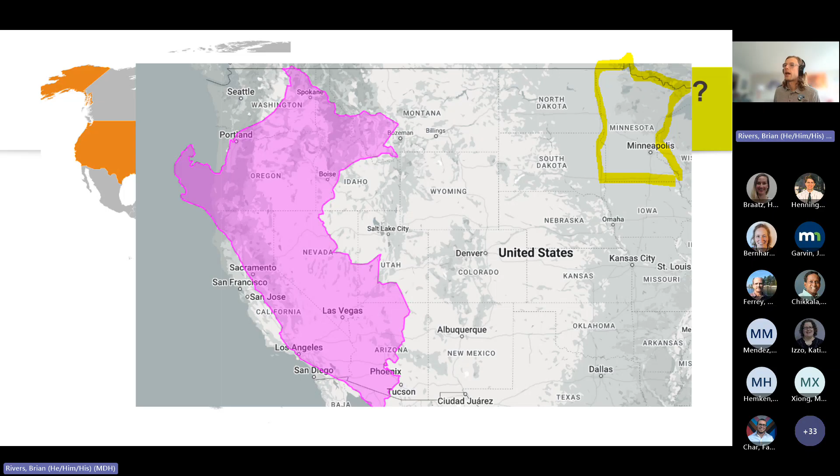So we don't only work in Peru, but we also work in Guatemala, we work in Bolivia, and like I said earlier, we also have domestic projects here in Minnesota.

So I've alluded to Peru, but let's talk about my favorite country outside the United States. This is Peru. It's famous for being the seat of the Incan Empire. It's one of the most biodiverse countries throughout the world. I think I'd heard that there's like 120-ish possible biomes that exist on planet Earth, and Peru has roughly 85 of them. So it is an incredibly biodiverse country.

It has some of the driest deserts in the world, contrasted with some of the rainiest and lush green jungles, which is the start of the Amazon. And then you have the soaring Andes, which is the second highest mountain range in the world. If you've eaten a potato, if you've ever had beef jerky, much of our blueberry production and banana production comes from Peru as well. So the food there is excellent. Yeah, it's a pretty excellent country.

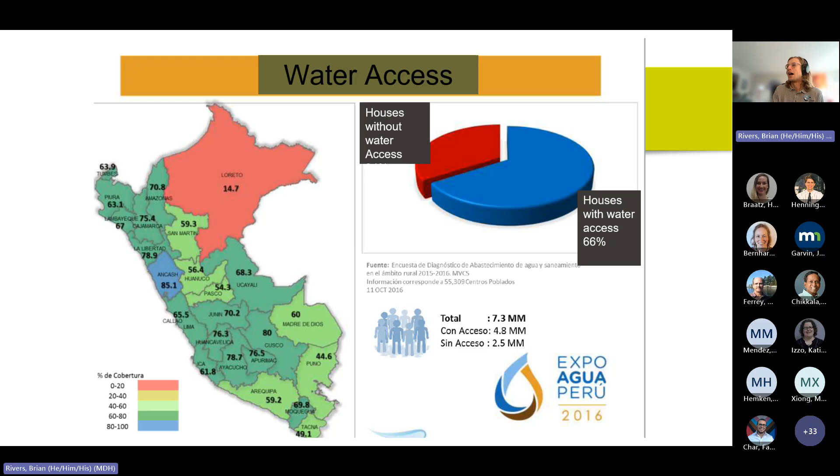For those people who may or may not have visited or know where Peru is - in orange, you have the United States of America here. In grade school, I always thought North and South America were directly below each other, but really South America is offset, where their West Coast more or less aligns with our East Coast. So if you take a 7-hour trip from Miami all the way down to Lima, you'll be in Peru. In this picture it kind of looks like a smaller country, but when I tell people about the size of Peru, I like to say it's pretty much the West Coast states all smashed together.

For reference, there's Minnesota. And if you were to take Washington, Oregon, California, and pretty much all of most parts of Nevada, and then some parts of Arizona and Idaho, you would have roughly the size and shape of Peru. So by no means is it a small country. Where we work is kind of maybe north of Las Vegas, as I would put it, in the jungle region, just over the Andes.

Being an incredibly culturally diverse, but also geographically diverse region of the world, getting resources to places can be pretty tough. And so water access - these stats are as recent as 2016, so I apologize for giving you antiquated data, but this was the best way to break it down as I could find it.

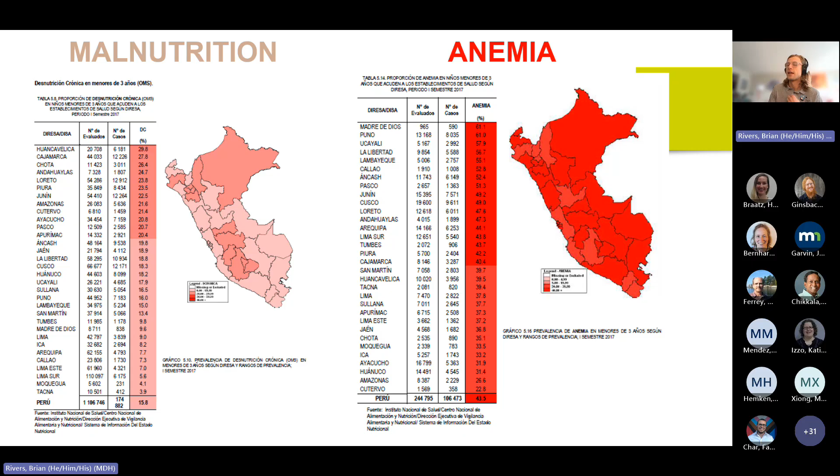When we talk about sanitation, the access is almost the opposite. 2/3 of people don't have sanitation access in their house, so that's quite a bit of a larger gap.

We even knew that when we were working in Peace Corps, everyone wants to work on drinking water because that's the snazziest, easiest, picture-friendly way to improve people's lives and deliver resources. But that's not the whole picture. We want to think about another whole slice of that pie: wastewater.

I found out that many communities were much more hesitant to work with wastewater because there's kind of a stigma around working with excreta and channelizing waste. Unfortunately, that really lags behind in places throughout Peru, for developmental reasons but also cultural reasons. So that's a really big opportunity to work on projects going forward.

Even within this project, we're working on drinking water, but that community still doesn't have a form of wastewater system, collection, treatment, and disposal. So that's definitely a huge opportunity we have going forward to expand our impact in this community.

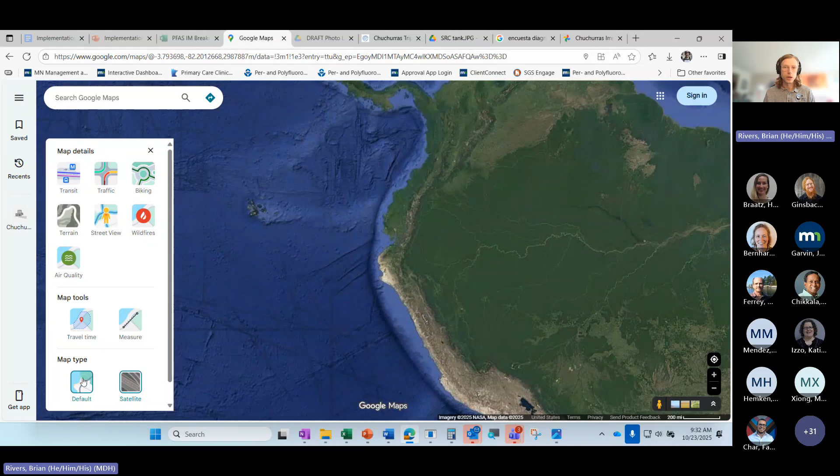Here we are in good old St. Paul. We take our flight down to Miami, then down to Lima. So here's Peru, in South America, on the west coast. We flew into Lima, and driving all the way to Chuchurras would be extremely difficult.

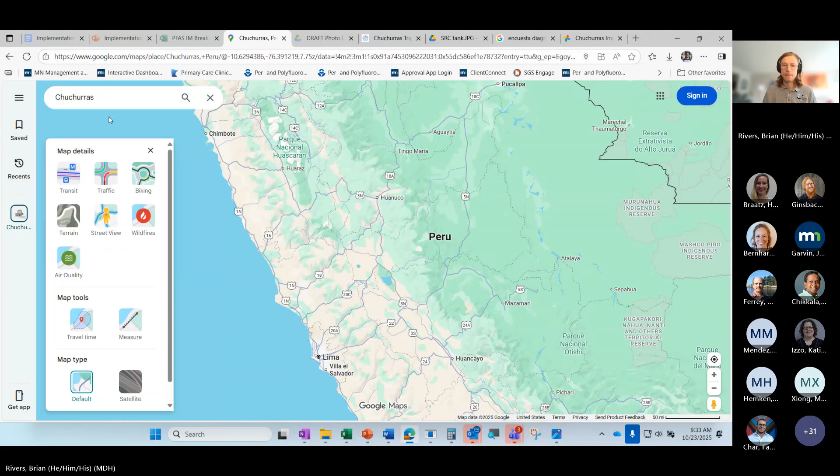Let me put up the terrain view. So there's our project community right here, and there's Lima. We flew into Pucallpa and took a nice 7-hour drive through the jungle. You can see the Andes Mountains here, and Chuchurras is just as you're leaving, nestled in a nice little pocket between a tiny hill range and the start of the Andes. Yeah, this is the community.

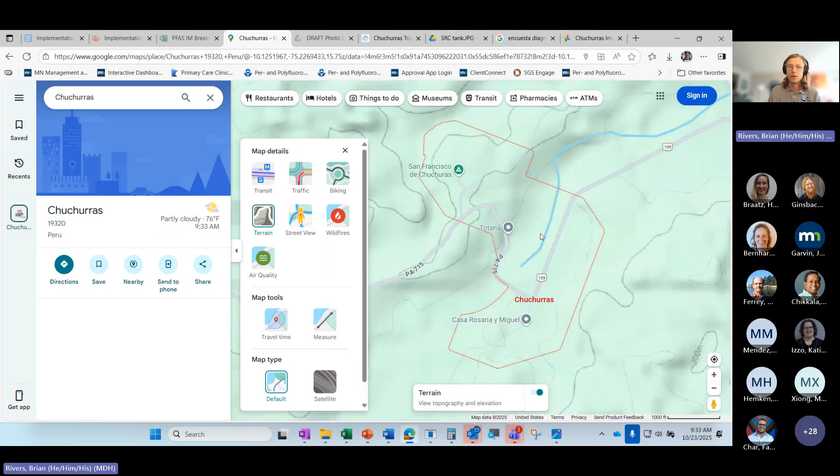Let's go back to satellite view. The community is really split into two different parts, 500 people throughout all of it. There's Santa Rosa on the southern bank, San Francisco up on the hill on the northern bank, and then there's the Chuchurras River — at least I call it that, but I'm not sure if that's actually its name.

But there's a river that flows through it, eventually becomes a tributary to the Amazon. When you're working in the tropics, they don't have quite the marked seasons that we do here. They don't have an autumn, winter, spring, summer. It's usually the wet season and the dry season, and during the wet season there's abundant water.

So the community had kind of an old, dilapidated drinking water collection system, but that only served the Santa Rosa side, which is on the southern bank. The San Francisco side, throughout the entire year, had to drink from the river. And if you know anything about surface water, it's a very vulnerable source of water.

We took some coliform tests with us, and of course those came back positive. So it's not a source of water that we want people drinking from, and they didn't want to be drinking from it either. That was the impetus for this project.

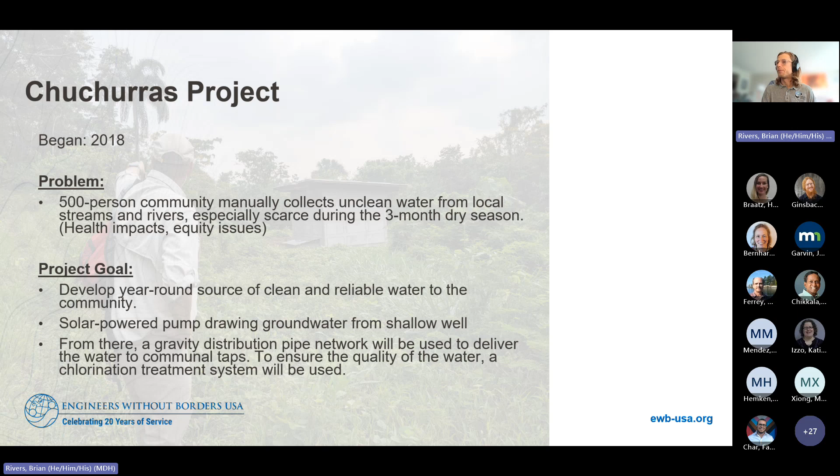This was kind of the timeline of the project. Back in 2018, we flew down there. I was not involved at that point; I was actually still in Peace Corps, so I was in country but far from here. We went and inspected the existing infrastructure that they had, saw some of the lapses and gaps in the community on the north side, and then started our assessment evaluation.

There were a couple of different designs, and eventually we landed on this solar-powered pump. Then in 2020 is when we were supposed to have our first implementation trip, but of course COVID broke out, so that prevented us from traveling.

So we were able to do some remote implementation with some contractors and people from Chuchurras as well. That started the well siting, the construction of the well, and the well house, which these people are standing upon right now.

In the second implementation trip, that was in 2023, we installed the solar panels on top of the roof, built out the distribution system, installed some communal taps, and then put in the first set of reservoir tanks. Then in 2024 is when I traveled, and that was the third trip.

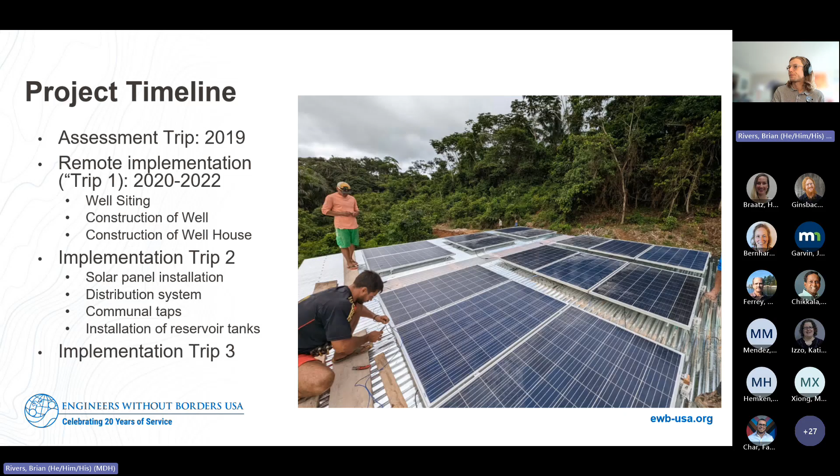Being that you're in a low-lying basin, you don't have a lot of hills to work with. The community did as best as they could on that south side, but there's really just not much topographic variation there. So part of our trip was to find something higher, a place where we could put 10,000 to 40,000 liters of water and deliver that throughout the community.

So we met with the community. We had a big communal meeting in which residents from both communities came and voiced their concerns and their needs. Then we came back to the United States and did a lot of the engineering analysis from the data we gathered from the initial assessment trip.

And then we're like, okay, great, we're ready to travel. And then COVID broke out. So during COVID, this was actually taken in 2021. I think most of these people had vaccines by this point, so I noticed they're not doing a lot of social distancing, but I think by this point that had made it down to Peru.

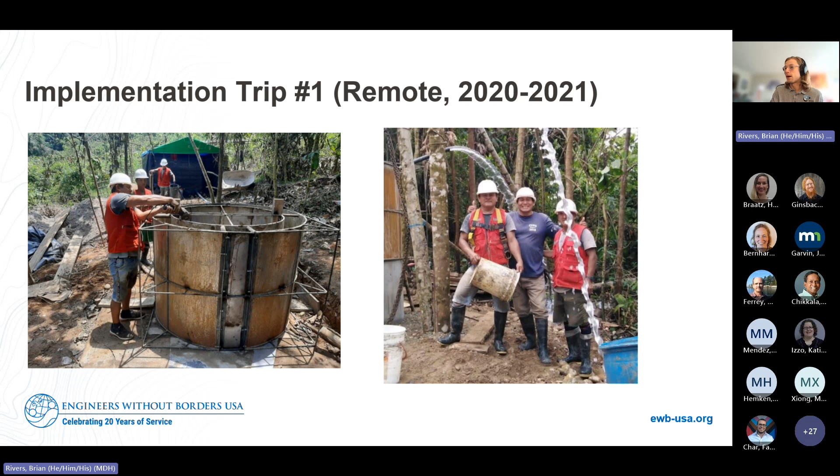They were able to get the water out, though I don't know how, because we hadn't installed the pump by this point. Maybe it was just an artesian thing. But that was a really big moment for that community, being able to find groundwater that was cleaner and more protected than some of the surface water sources they had. They were all able to do that on their own. We didn't have boots on the ground at all at this point.

The first time that we made it to the community was in 2023, once we had that well built. Another thing that's kind of missing from these pictures is that Ben-Hamin actually built the well house around this well. Once we had that water source secured, we started building out all of the distribution system.

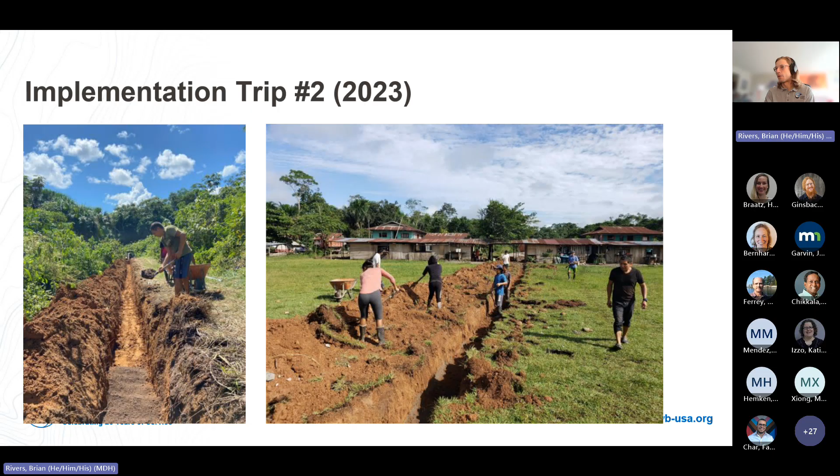The community showed up in force. We had probably 50 to 100 volunteers helping us. They did not dig all these trenches by hand—there was definitely an excavator there, but a lot of the manual work was putting the tubes together, making sure there was a nice fine layer of base underneath to protect it, and then backfilling it back in. So we did a lot of that with an excavator, but a lot of the manual work was just placing and securing that pipe.

You can see a little bit more of the well house here, which is where the well is inside of. We installed some valve boxes to be able to control the flow to and from the source. That occurred while we were in country.

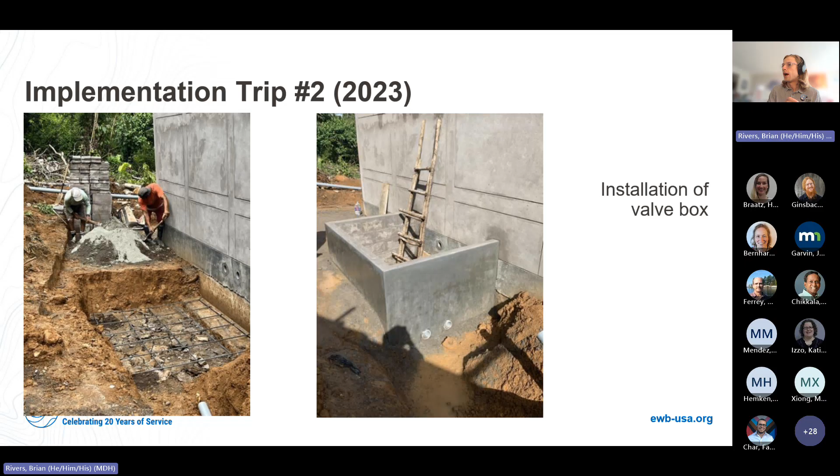This is a picture of that finished well, and this is when we were installing the pump. This is Paige, one of our volunteers, installing a Grundfos SL 900. I think I'm mixing up my Hach instruments and my Grundfos instruments, but that's a pretty awesome product from Grundfos, which is a solar pump.

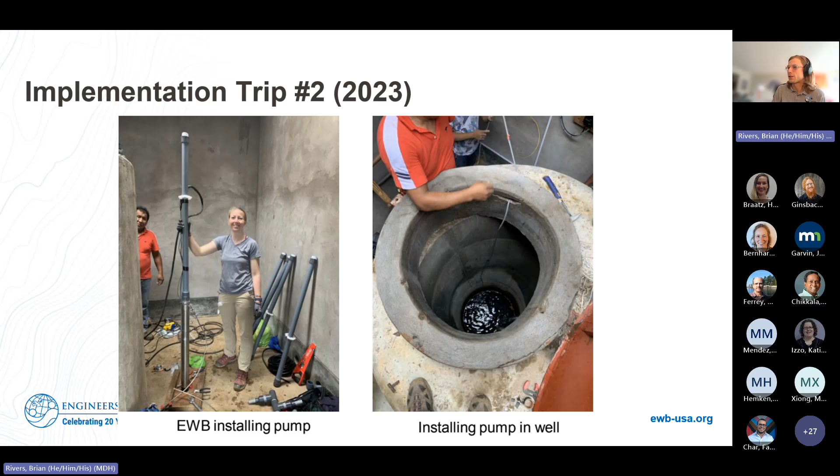And that is what delivers the community their water. So we installed that in the well. And this is a much better picture of that finished well building, or the pump house, I should say.

So once we got the roof in place, we secured these solar panels, which power the pump. I wish I had an actual flow rate for you. I could make one up off the top of my head, but I'm not going to do that.

This was another amazing feat for that community, to build something of a state-of-the-art facility for that region to get water from a groundwater source. We take wells for granted here in Minnesota because we have so much of it. The groundwater is so abundant, but in Peru, a lot of communities rely only on surface water. So having something that can draw filtered water out of the ground is a huge step.

I'm glad that you don't take wells for granted, Michael.

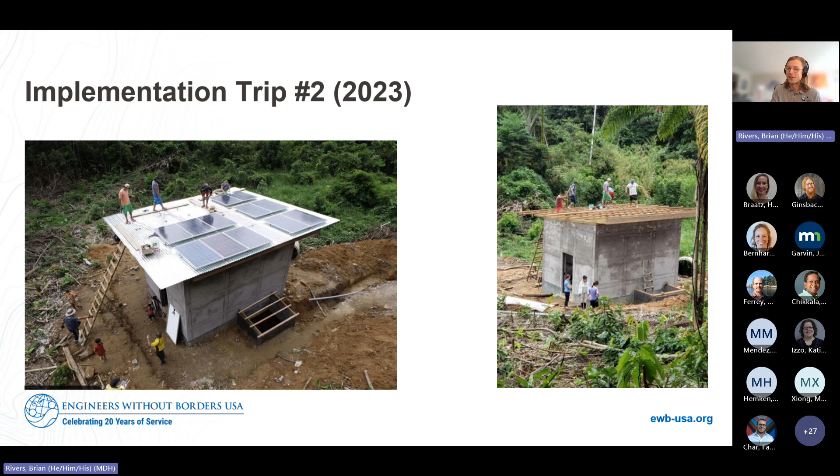I know we're getting up on time, but in October '24, after we built out the first part of the distribution system, we wanted to expand that as well as update a lot of those reservoirs. We had installed 4 tanks, but we wanted to quadruple that size, and then install the chlorination system, automate that pump, as well as install some communal taps.

As you can see here, this was actually just a picture. This is what happens from the celebration at the end. Chris brought some manufactured snow from Minnesota, so that was kind of our token. And all the kids, of course, just pounced on it like vultures.

This is how we got to site. It took us about 7 hours to drive 170 miles, which included a couple of river crossings on these ad hoc flotillas - like 2 river boats slapped together to get your car across. That was a very unique experience.

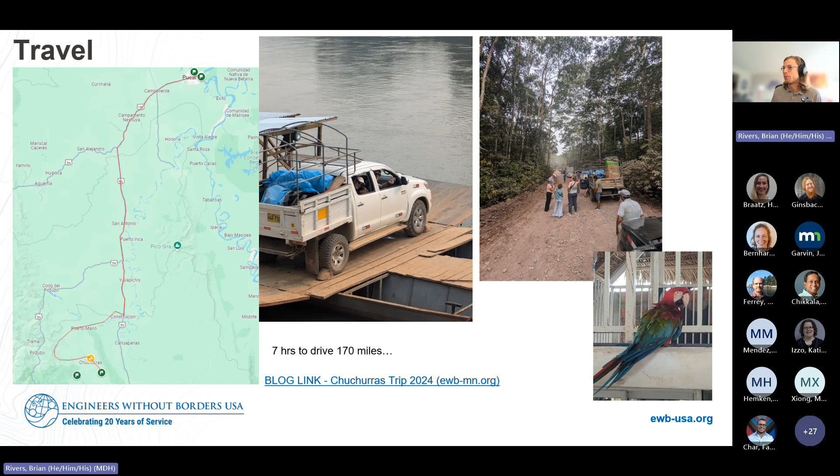We ran into some road construction, saw some cool birds. So yeah, this was the project here.

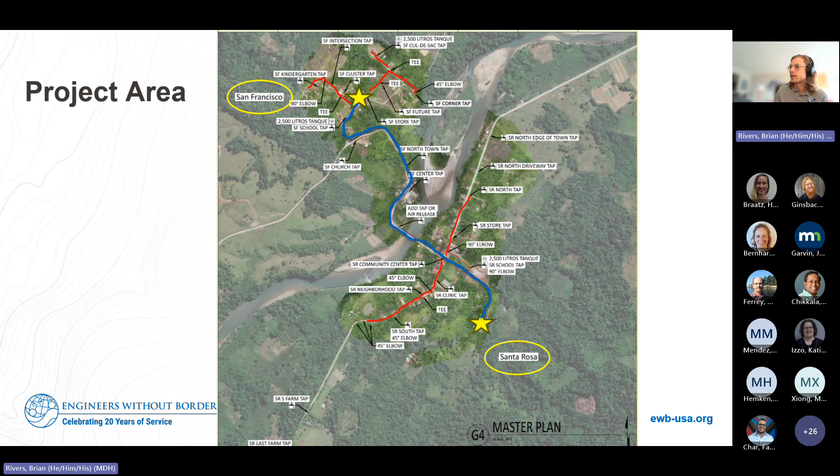Originally when we arrived, I wish I had a better picture, but we had a capacity of basically one of these tanks, though they were all smaller, 2,500 liter tanks. We relocated those and installed these larger tanks - they all have 10,000 liter capacity, and there's 4 of them, so that's 40,000 liters for that community.

That's at the high point of the community. That's actually much larger than their daily needs, but we're anticipating growth in this community, so we'll have room for them to grow.

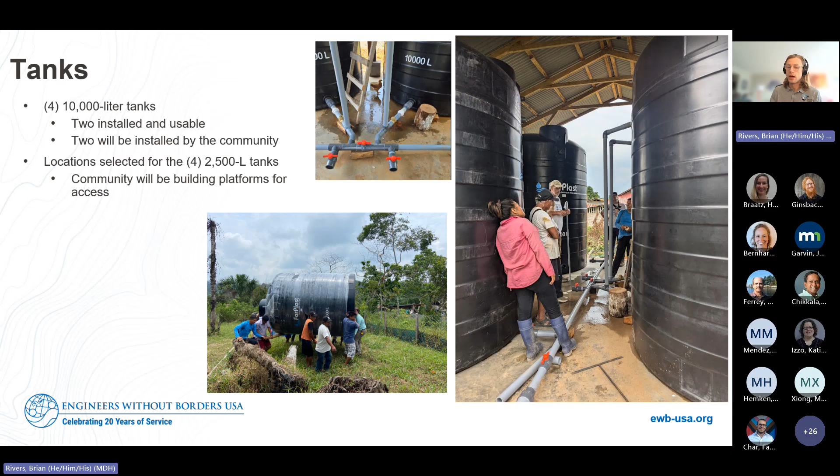Again, we built out the distribution system. We were doing a lot of the training on how to properly install PVC pipe using glue and primer and so on, holding it for the correct duration, securing it, putting a proper bed underneath of it - this was lower on the screen here. This is the work we did to put some of that sub-base below it.

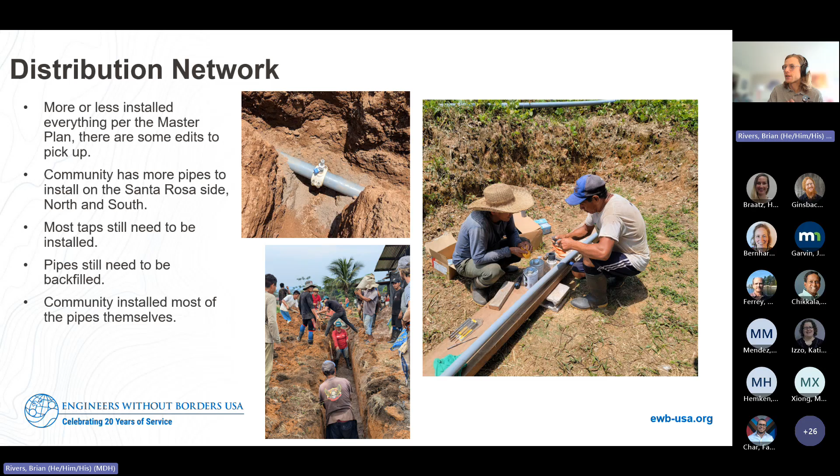A lot of it was just schlepping the dirt from one pile to another and making sure we had proper alignment, proper depth there. Not all of it got installed - I would say we're about at 80%. We still have a couple of places in the community to reach.

Here were some of the taps that we installed. Once the distribution system more or less came to a location - we're not delivering water to people directly in their house, what we're doing is having communal taps, delivering to a tap stand around a cluster of houses. We just didn't have the budget or quantity of water to get water to people in their house, so our compromise is getting places to where water is needed by the most amount of people, and that's where we have communal taps.

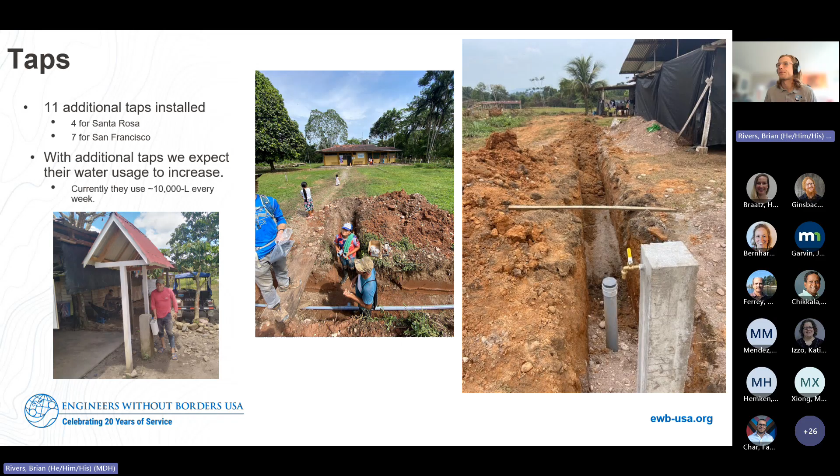So we installed the pumps, and ideally they're going to work automatically. However, we're still troubleshooting on how to get that automation. So at the moment they work manually. Ricardo has to go to the pump house every day and flip that on to send water from the well to the reservoir.

So we're hoping to get about 75 pounds per square inch. Again, I wish I had a flow rate for you, but that is kind of how we're working there.

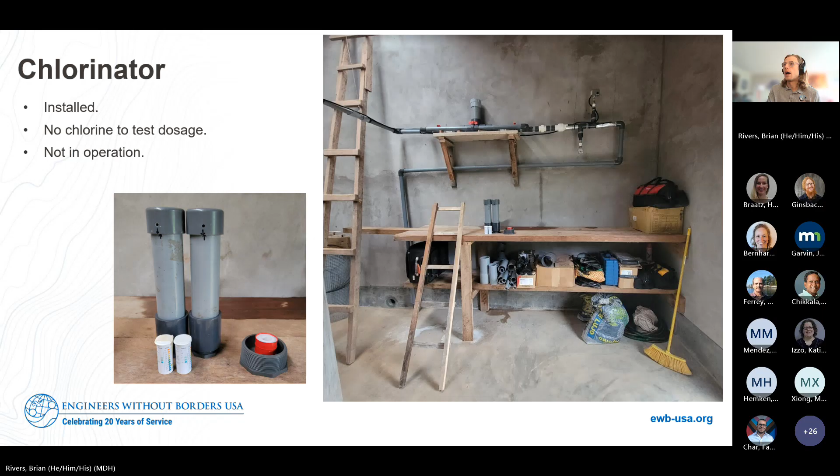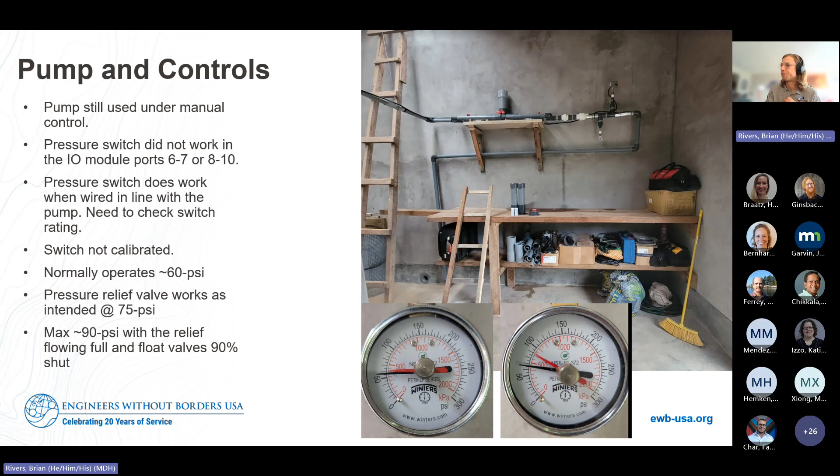And then, that was kind of the extent of what we were able to install. So we upgraded the tanks, we expanded the distribution system, we installed a treatment system, and then unfortunately, we didn't make a ton of progress with the pumps and controls. We were able to get a better electrical connection there, but we still have to troubleshoot and do some automation.

And then they had a huge soccer tournament there while we were working, so that was kind of an interesting traffic jam. We had a big community celebration, and got invited out into the community to explore how they lived in their everyday lives.

So here's the much larger tanks, and everyone, basically all of the travel members are from Minnesota, with the exception of Brian. He's from Iowa, but they all work within our chapter.